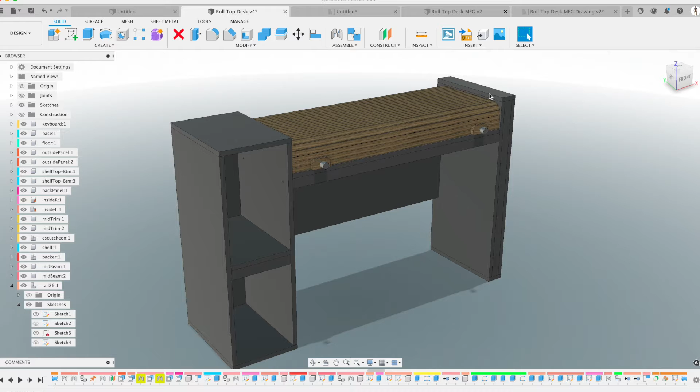All right, so I'm going to walk you through this roll top desk project I did in Fusion 360 and then built with a combination of a CNC router just for this groove part here, and then the rest of it is easy to do on a table saw and maybe a chop saw. You could probably do the whole thing with a circular saw.

It's not that complicated. So the first thing to know is that if you go to modify, change parameters, it's all parameterized. So the important one here probably will be the thickness. So wood thickness right here, 0.6875, which is 5/8, right? I think that's 5/8. That's the thickness of the project panels I used to make this project.

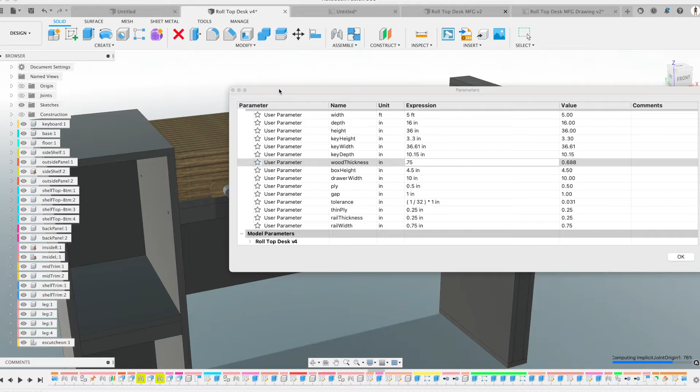If you change that to, for example, 0.75, I'm going to hit the tab key. You'll see it's going to think for a second. It's going to load down here. And then if I did everything right, you should see, yeah, errors pretty much all the time, but no big explosions, no parts in weird places or anything like that.

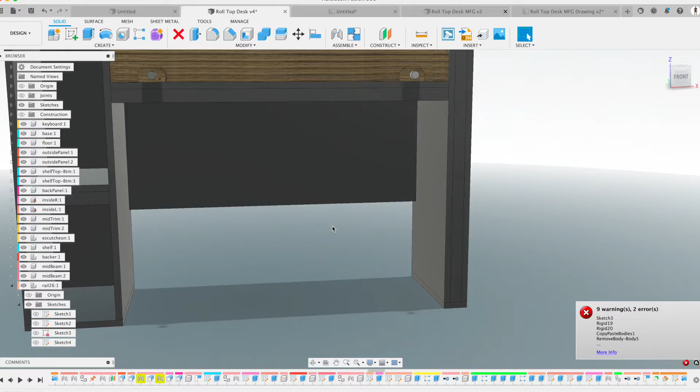It's pretty good. I've tried it with a few different sizes, and I haven't really seen any major problems with it. So if you've got 3/4 inch plywood or even 1/2 inch or something like that, it probably would still just work just fine. So that's part number one. I'm gonna undo so that it's the actual dimensions.

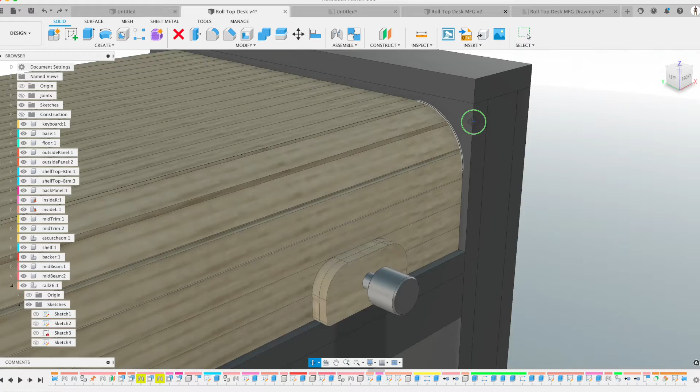The second thing about this one is obviously the roll top, right? How do you figure out the geometry for that? And I'll walk you through that real quick. But just first, as a concept, understand that the way this works is there's just a sheet of cloth behind this thing, just some canvas fabric, and then these are all glued to that so that they're adjacent to each other, and it basically just creates a little hinge effect along this edge right here.

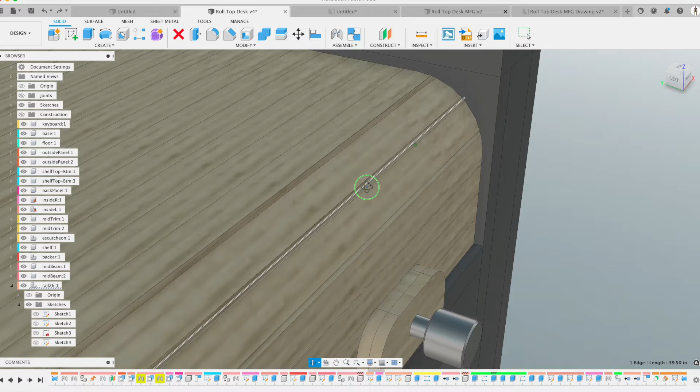So if I move around, you see that that's the edge that the thing hinges on. And this thing works pretty good. It's a little tight in there, a little awkward when you're going up this part right here when you're pushing the thing, but the rest of it, I mean, it opens and closes smoothly and works just fine. You can see that it covers the whole top.

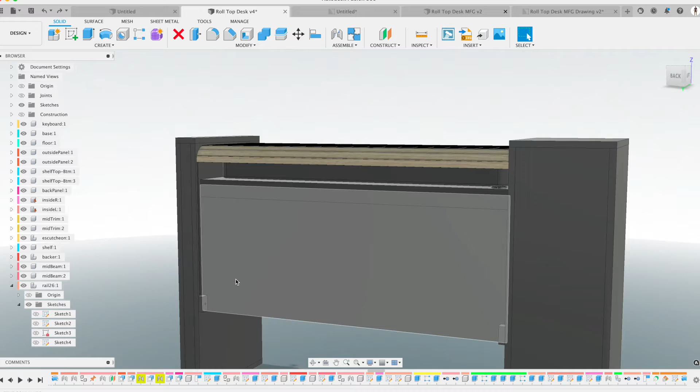I would have made this groove deeper if I were planning on this being visible in the back. I might also just put a panel back there that covers this thing up, right? So that you don't see the inner workings of the roll top going through the track. But in my case, it's up against a wall, so I'm not messing with that.

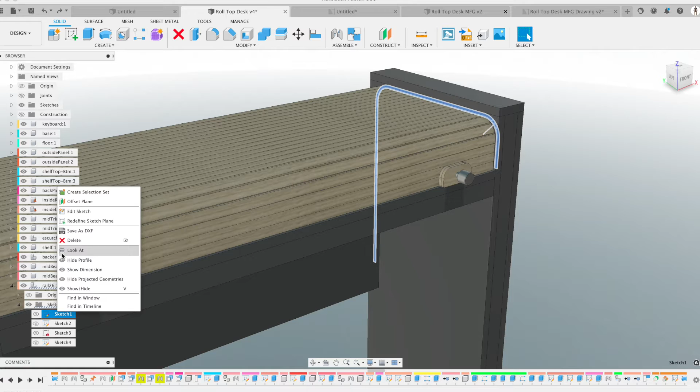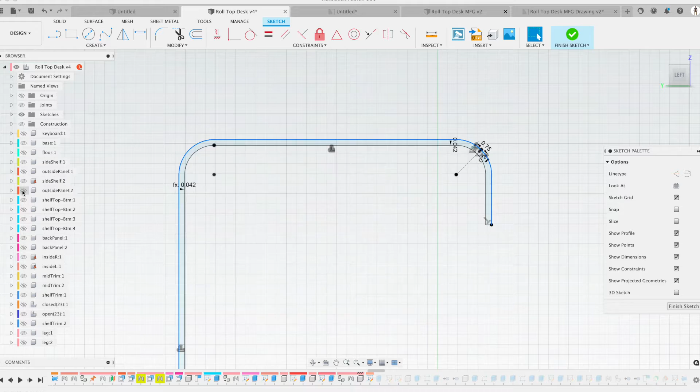So to explain how that works, I will start with this sketch right here. So I'll right click and edit. And then I'm going to right click on this and isolate that component. Now this line here is something I projected from a previous part, right? I looked at my side here, which I think is side shelf, inside, outside panel. It's going to be inside.

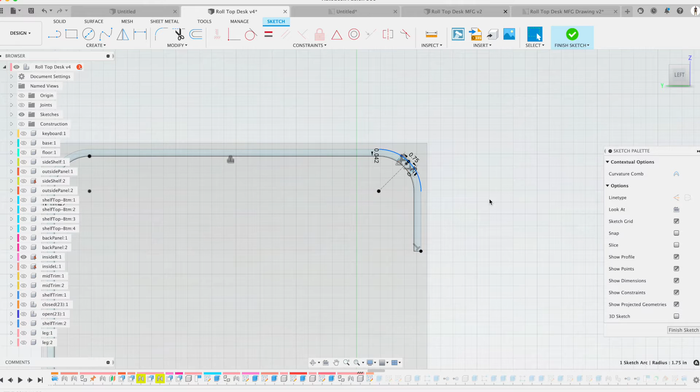So you can see I drew this so that I've got a 1/4 inch gap between this groove here and the edge of the piece of wood, right? Started with that. And then I just kind of arbitrarily said, okay, well, I guess 1 3/4 inches is a good radius there. I think I could work with that. That was just a shot in the dark. I didn't really test it out. I just went with it. And then from that, I started with a single slat, 1/4 of an inch by 3/4 of an inch.

Once again, those are parameters. So if you look at change parameters, you should see 0.25 rail thickness and rail width of 0.75.

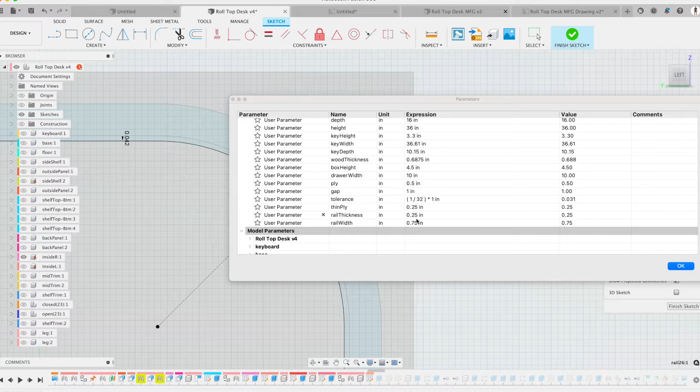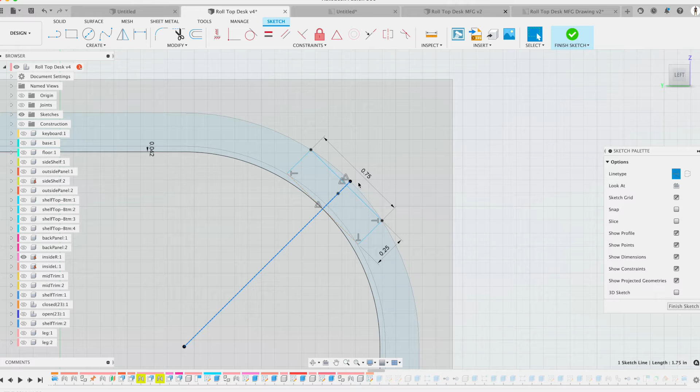There's a line from the center of this radius to the midpoint, right? So that is my midpoint of the shape of my slat from sectional view. And then I make sure this point and this point are touching, right? So I know that they're going to be on that line. And then make sure this is on the midpoint of this center line between the middle of the arc and the center point.

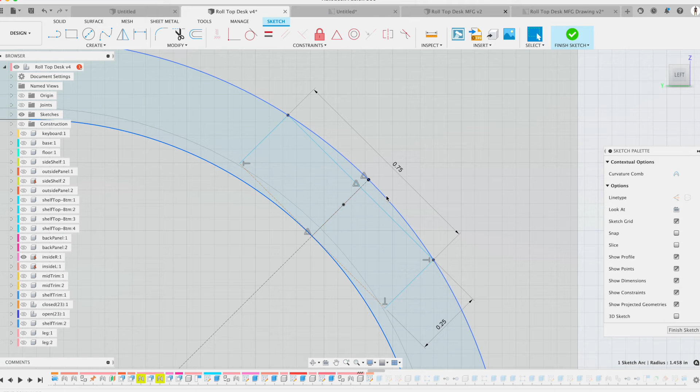I know these two dimensions, and then I offset this line here. So I was thinking this groove is going to start at 1/4 of an inch, and I'll go from there. It looks like I need a 0.042 inch gap to make this tangent to the inside line.

This is ensuring that this rectangle will actually fit inside here and be able to move around inside that groove. Now notice there's no tolerance, right? I didn't add a tolerance here, which obviously you would do if you were going to stick with this square profile.

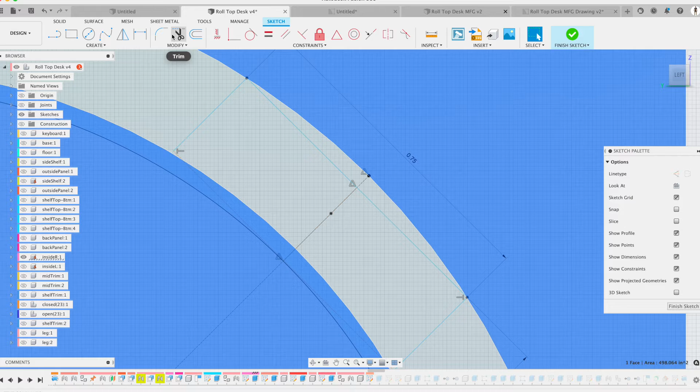But I routed off these edges at about 1/8 of an inch, so they'd be round, and I knew that would give me enough slop, because you'll be able to see here, right? So if I were to do this, 0.125 by 2, that's about what I ended up with. So I know I will have some room in there, and that's how I figured out a single slat.

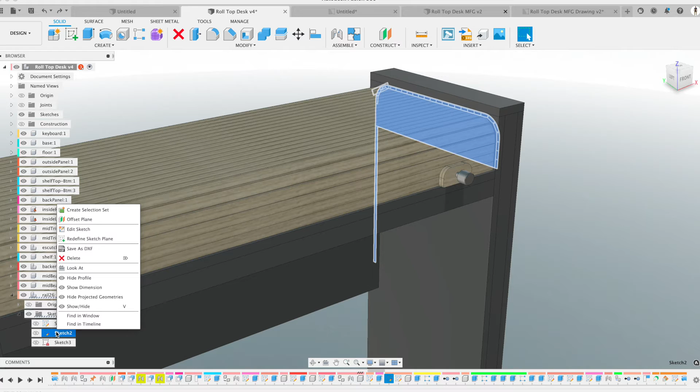I'm going to undo to get out of here, and I will go to this sketch, edit this, and this is how I figured out all of the additional slats to make sure that they would all fit and fully cover the top. As you can see, I've got a note there. There's 26 of them. We're looking at the front here.

So I'm starting with, okay, I know this is it in a closed position, right? So I've got my rectangle that's this parameter by this parameter, thickness by width, and then I just start chasing them up. So I can draw these individually and add the parameters, or I could do a pattern using the parameters.

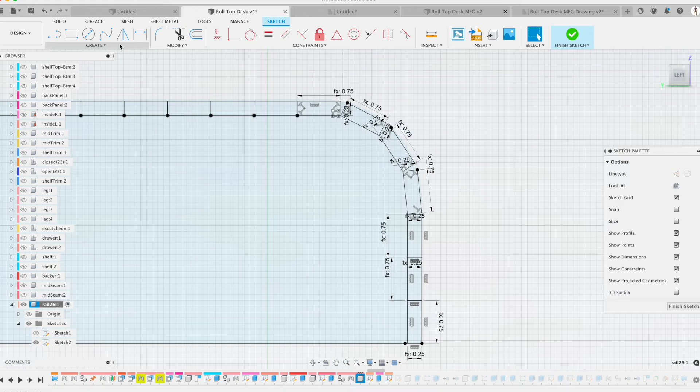The only thing you really need to do manually is here, right? So again, you can see these lines are projected. So there's that profile right there.

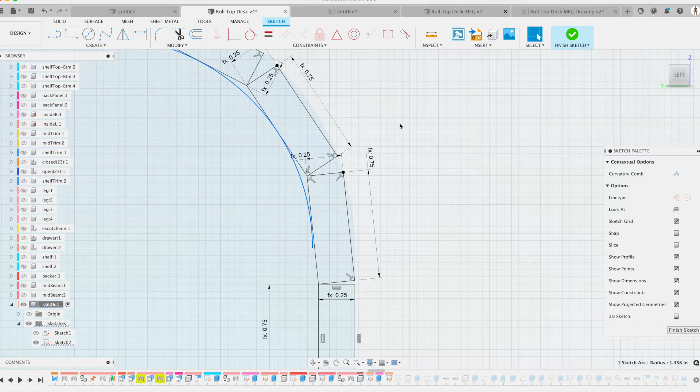Using these lines here, you can see all these little constraints on everything, right? So there's a rectangle. This is tangent to this. These points are coincident with this part right here.

And I'm just making sure the hinge position is there, and that these points are touching the outer edge of the groove. And then you do the same thing back here.

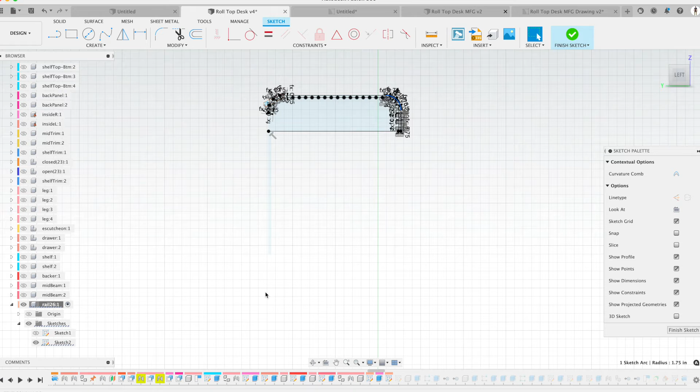And I stopped at 26 because I wanted to be able to use another project panel for the back, and that was kind of my limit as far as how far down it could go and still be structurally sound. So that's why they don't go all the way down in the back. Also, you can't see it, so it doesn't matter.

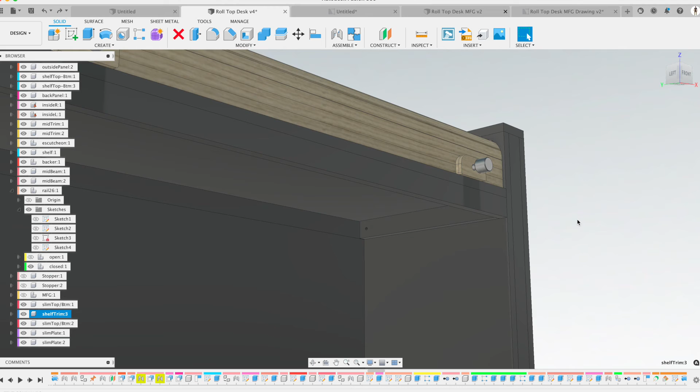And that's pretty much it. So once I figured that out, the rest is just basic rectangles here. I've got these little ledges because I know those are going to be structurally sound. This thing won't bow. It comes apart in pieces. You'll see that in the drawings and the instructable.